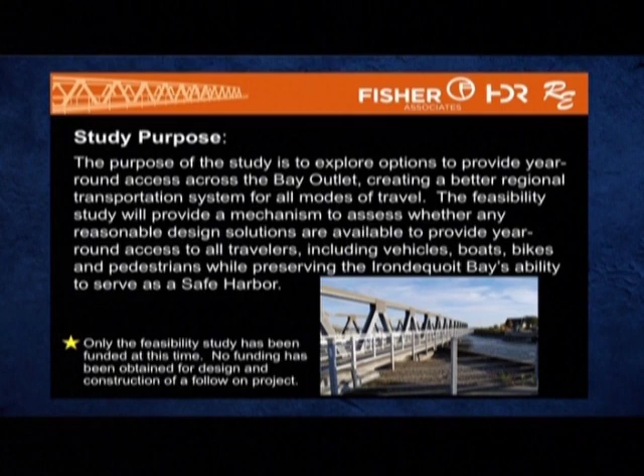From that point, we began an existing conditions analysis because things do change over time, so what might have been documented in previous reports needed to be looked at again and confirmed from an environmental and traffic standpoint. We collected all that data, and then held our first public informational meeting to discuss and present the results of our existing conditions analysis.

From there, we started developing a preliminary list of alternatives to look at as part of the feasibility study, evaluating potential impacts and costs of any alternatives considered in detail. We also conducted a public informational meeting at that point, outlining the preliminary list, and gathered input on some additional alternatives the public wanted to see evaluated. Those were added to the list as well.

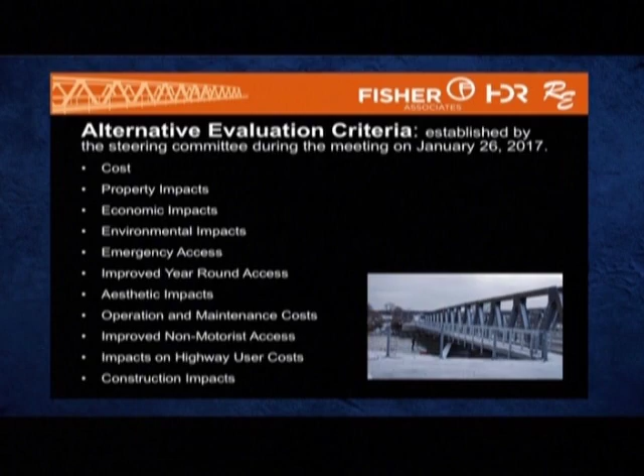They ranked them, one being what they felt at the time to be the most important. In this case, it was project cost, through construction impacts being ranked number 11, the least important for evaluating the criteria.

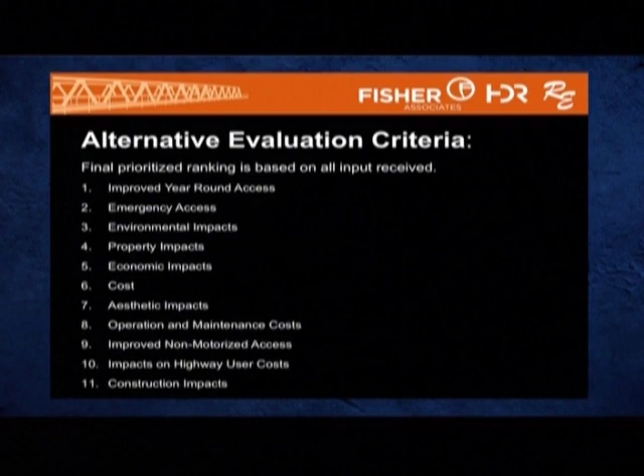So temporary detours, impacts to businesses, things of that nature were wrapped into construction impacts. This is the hierarchy that the objective process established to evaluate the alternatives, and this was set up prior to developing any of the alternatives, so it was a standalone scoring metric that could be used in the study.

The next step, back in January, was to develop the alternatives to be considered. This is a culmination of that list, and as Roseanne mentioned, at the first public meeting not all of these were under evaluation from the previous reports and the stakeholder committee when we started brainstorming what alternatives could be out there.

As part of that first public meeting, a tunnel option and a ferry option were also brought up as possible solutions that should be considered. So we took those in, responded to that public comment, and added them to develop the whole list. Starting at the top, the null alternative is fancy words for the existing condition—it's what's out there now.

It's the seasonally operated swing bridge that is put in place for vehicle traffic during the winter months and removed from service to allow navigation traffic during the summer months, not providing access for cars. That's a basis of comparison alternative, and that's why it's still in the mix—it's what's out there now, and the basis of all comparison.

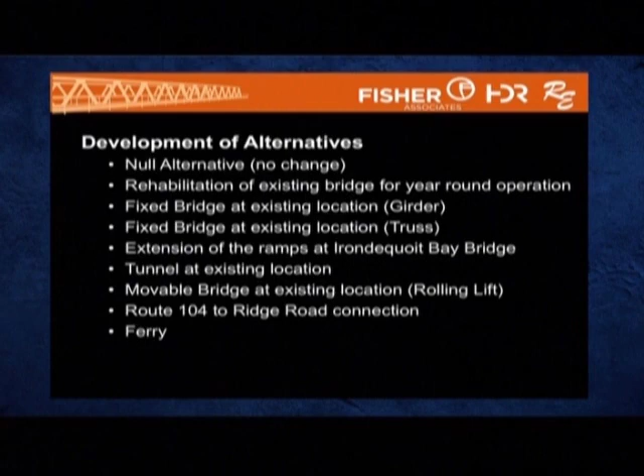We did some preliminary evaluations for feasibility, impacts, constraints, and situations. As mentioned, on the fixed bridge the Coast Guard required 75 feet of clearance for nautical traffic. When we looked at the impacts to the roadway, businesses, residences, and the character of the outlet area on both the Webster side and the Irondequoit side, the steering committee felt those impacts were too significant.

Similarly, the tunnel option, to get the roadway depressed underneath the outlet, required quite a bit of ramp network—instead of going up and over, those ramps were going down. That really interrupted access to the businesses on both the Webster and Irondequoit side, as well as the houses. So looking at the charm and character of the area, that alternative was also deemed not to be continued for further evaluation.

Then for the ferry, when you look at the staging of a vehicle, loading, traveling across the outlet, and unloading, a person could drive around the outlet or around the bay to the south and get to their destination quicker than using the ferry. So it wasn't serving the transportation connection purposes the study is looking for, and it was deemed not to be considered for further detailed evaluation.

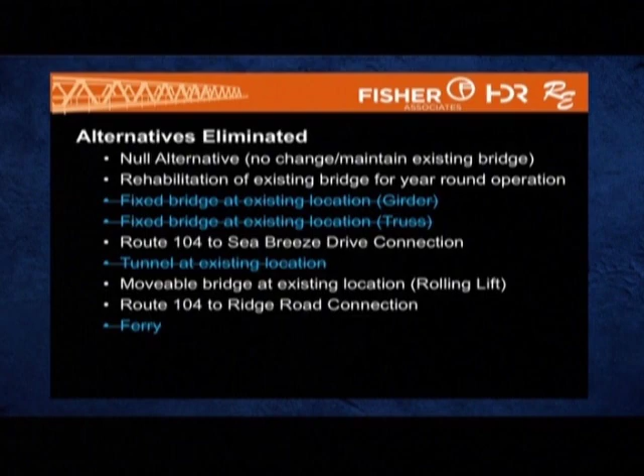Once those are removed, we're left with 5 alternatives that the process carried through to detailed evaluation and scoring, to see how the impacts of those alternatives are affected under all 11 criteria.

The 5 alternatives carried forward: the null alternative, maintaining the existing condition; rehabilitation or retrofit of the existing swing bridge to make it movable on a more permanent year-round basis; Alternative C, the Route 104 connection up to Sea Breeze Drive; Alternative D, a brand new movable bridge at the existing outlet; and Alternative E, the Route 104 connection to the Ridge Road area.

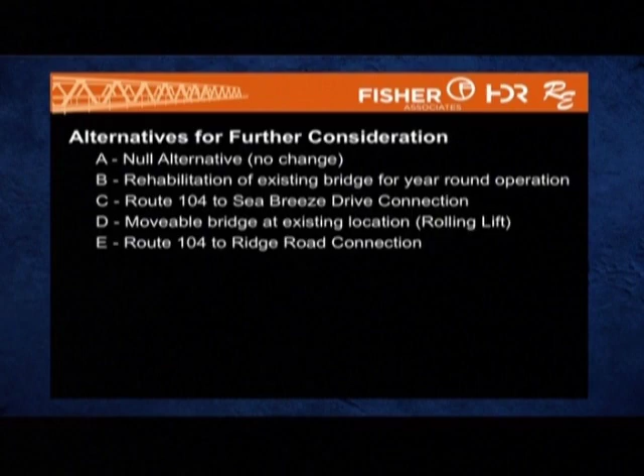The null alternative means no change. Some impacts to consider: there's no improvement to year-round access or emergency access during summer months—it would operate the way it is now. Additionally, environmental considerations like floodplains, wetlands, endangered species, noise, and impacts to properties are all unchanged.

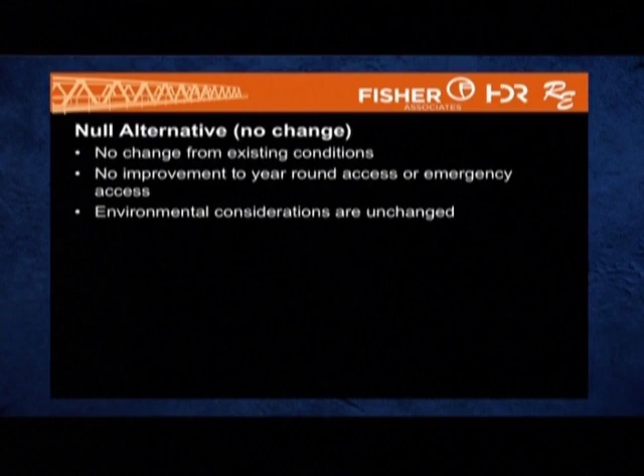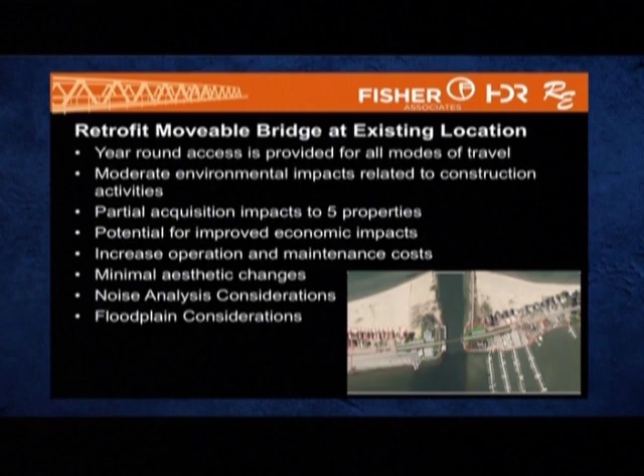Because it's a similar bridge to what's out there today, with its only change being how it's operated and that it's slightly higher, there's a minimal change to the aesthetics of the area. The nature and profile as it relates to the waterways stays fairly consistent to what's out there today, so it's a minimal aesthetic change.

With this alternative and that slight vertical increase, noise considerations would need to be analyzed down the road if a project were to come of this, deferred until later when you have actual traffic data and actual time of construction. The noise analysis and traffic studies have to be done within a certain time of when a project is going to be built, so the data is valid and suits the needs of the community. Whatever agency is leading the project would be responsible for doing the study and determining the significance of the impacts or mitigations required.

Floodplain considerations: as we all know, the lake and bay are within a designated floodplain, and this summer has seen its fair share of water. Looking at this project in that designated floodplain, because the roadway and bridge are already where they are, it's technically outside the effects of the floodplains, though they encroach near them. This alternative would have minimal impacts to the change of that floodplain because it would be built within the same footprint as what's out there today, so it wouldn't have big significance one way or the other from a floodplain standpoint.

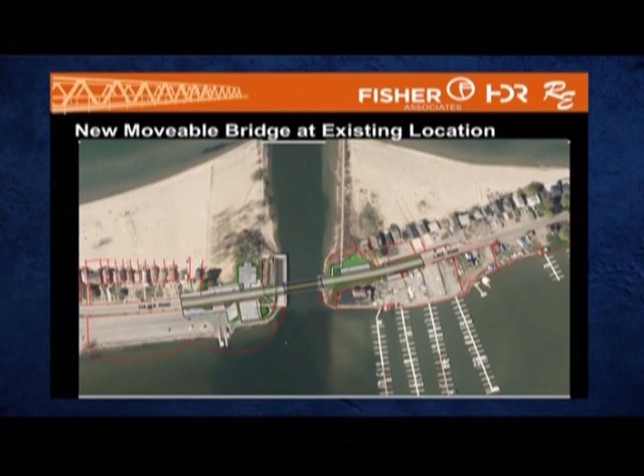Screening it again, very similar to the other alternative I just discussed as far as how this alternative would affect the area.

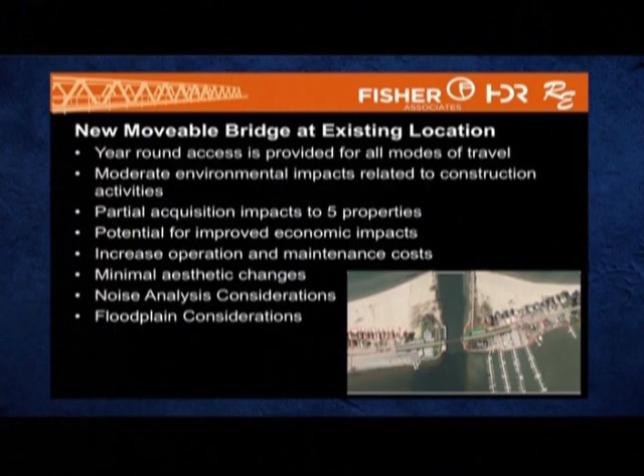So just looking at what a new movable bridge looks like, in this case the one we're looking at is called a rolling lift. It's where the steel girder structure of the bridge spans the outlet and has a counterweight on one side. When the bridge needs to open, motors engage the bridge and that counterweight tilts to one side, lifting the span of the bridge up, providing unfettered access to the outlet, so there's unfettered vertical clearance for those tall ships to get in and out.

To make that work, when we talk about raising that profile up about 6 feet, that's bringing the approach road work up on about a 5% grade across the outlet and back down. So that's what's establishing those eastern and western limits for the alternatives to tie in.

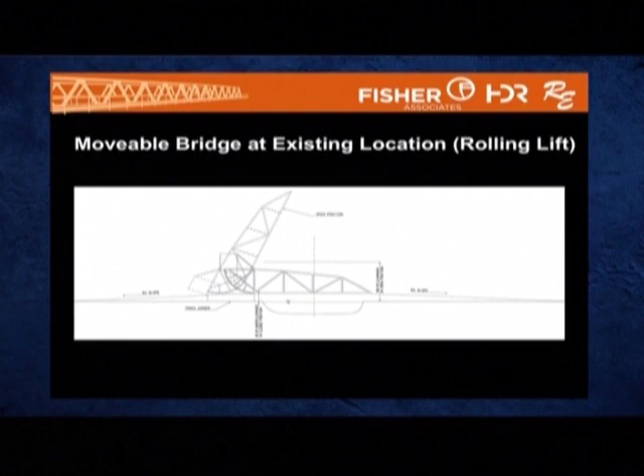When you look at nationwide standards of how a movable bridge operates and the time it takes, there's a process that goes along with it: lowering of the safety gates to stop vehicle traffic, the signals associated with that go to red, very similar to a railroad crossing, stopping vehicle traffic. That process going from green to red takes about 90 seconds.

Lifting the bridge up or swinging it out of the way under that retrofit operation takes about a minute and a half as well. Boat traffic, the marine traffic, would have about 2 minutes to navigate through the outlet. Then the bridge would close in about a minute and a half. The signals going back to green is a slightly quicker process than when you close it off, taking about 30 seconds. So that whole operation, from when the signals start to go to red to when they go to green and vehicle traffic can go, is about 7 minutes in duration.

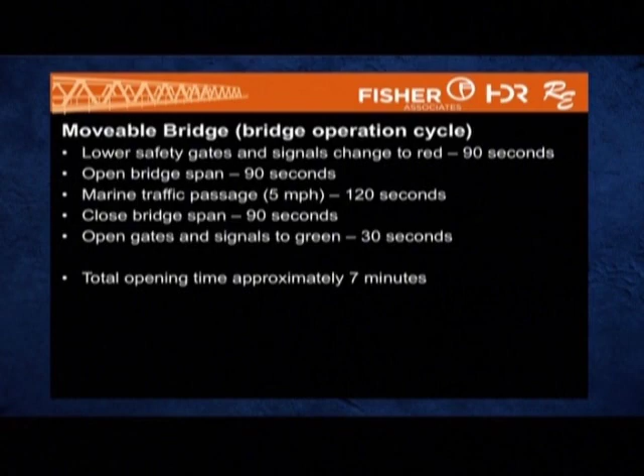Thanks, Rick. So obviously with that bridge opening, there's going to be some delay to vehicles that want to cross over the outlet while that bridge is open. What we've done is developed an estimate of how long those queues are going to extend when the bridge is up, so how far traffic is going to back up along Culver Road and on Lake Road.

And to step back a little bit here, this goes back to our first public meeting when we talked about how much traffic uses the bridge now and what the traffic is like in the area. Right now, in 2010, there's about 5,000 cars that cross over the bridge. We did some counts in March of last year, and that number is about 5,300 now. You can see some of the traffic on the surrounding roadways going all the way down to Route 104.

When the bridge is closed, you can see that traffic significantly drops on the northern ends of the roadways, and then there's slightly more traffic on Route 104.

We did find, going back in previous traffic when the bridge was open all year round, that summertime traffic is about 50% higher than during the fall and winter months. So there is a slight increase in traffic during that time frame. If there was a full bridge in place during the summer, we would expect between 7,500 and 8,000 cars going over that bridge.

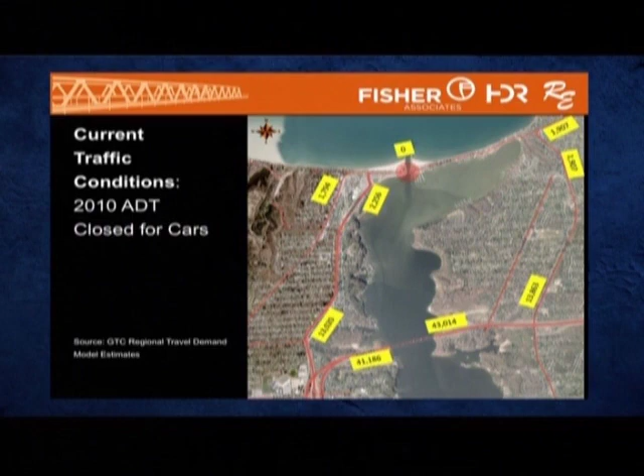Per day, yes. So with that information, we took a look at two conditions: the off-peak season conditions, which would be like your typical spring or fall day, and also the summertime, what the queues would be.

These are the estimated queue lengths during the off-peak hours. We looked at the time frame of approximately 7 a.m. to about 9 p.m. at night, so about 14 hours. Within that 14 hours, there are 3 or 4 hours in that day where traffic is the highest.

During the other 10 or 11 hours, traffic drops off significantly. We averaged what the queue lengths would be during those time frames. During off-peak hours on a typical weekend during the fall or spring months, on the westbound side you'd have traffic that queues back about 600 feet, and on the eastbound side about 600 feet too. When that arm goes up, it takes about a minute for that last car in line to get over the bridge, so you've got a delay of about 60 seconds.

During the average weekday, the peaks are a little different. Your peak hours are about 7 a.m. to 9 a.m. and then 4 p.m. to 6 p.m., your typical commuter hours. On the weekends, it's generally between 12 and 3 during the peak times of the afternoon. During the weekdays, the queues are a little longer because traffic volumes are higher, again around 650 to 700 feet.

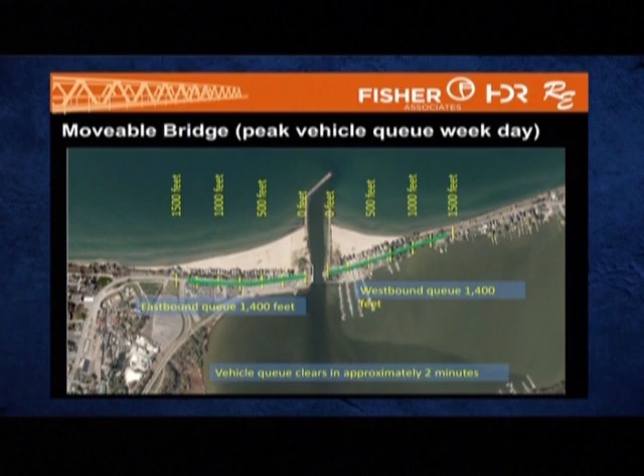There are ways to mitigate these peak hour queues. A number of locations across the United States that have movable lift bridges have a regular published schedule for when the bridge is open and closed, and everybody knows when it is. At some of those locations, during peak hours of traffic flow, the bridge stays closed for 2 or 3 hours continuously and won't let boat traffic through.

So that would be one of the things that could be discussed with the Coast Guard - if one of these movable bridge options were to come to fruition, that during these peak time frames we would want the bridge to stay closed to allow vehicle traffic to cross over.

Thanks. And again, that coordination with the Coast Guard would occur when an actionable project were to be developed in the future, similar to the noise analysis and other environmental studies that would have to be done at the time with current traffic, current conditions, and regulations in place a few years down the road.

Moving to another alternative for consideration, the Route 104 connection to Seabreeze Drive. Some of the impacts and concerns for this date back to when the original Bay Bridge was put in place, and those stub ramps on the west side of the bay were built as part of that project back in the 60s. They live out there today, not connecting to anything.

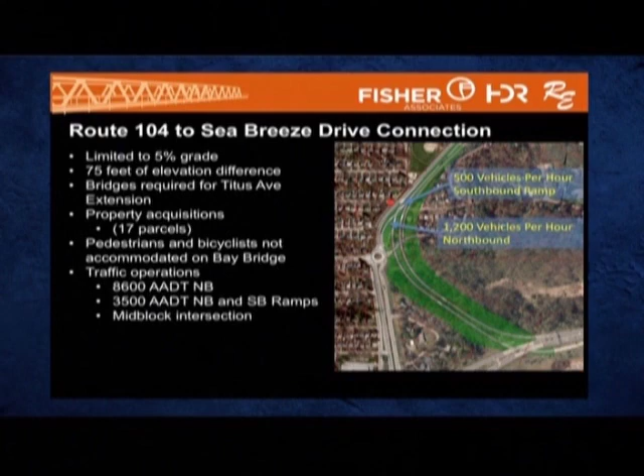Moving on to the other alternative, the Route 104 connection to Ridge Road. Here we're looking at 104 westbound and eastbound, with 590 north and southbound in that area. Irondequoit is to the north, points in Penfield to the south.

This would require a new ramp off 104 westbound, coming down and merging with the existing 590 off-ramp to Ridge Road, navigating through that intersection to the east, then heading up the 590 on-ramp to the north and continuing on. There would also be an on-ramp from 590 to 104 eastbound to provide those connections.

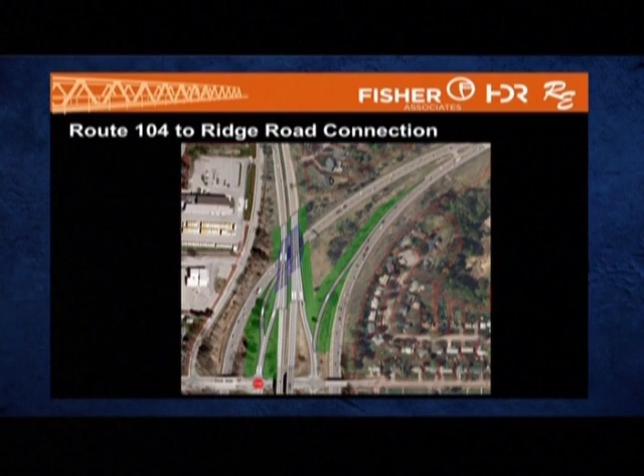Circulation of traffic would look like this: if you're coming from Webster heading to Irondequoit, you would travel 104 westbound, take the new ramp up, go through the intersection, a left, another left, and head up into Irondequoit. If heading the other direction, from Irondequoit to Webster, you would come down 590, use the off-ramp from 590 to Ridge Road, go through the same two intersections, go up 590 north onto that new slip ramp to access 104 east and out towards the Webster area.

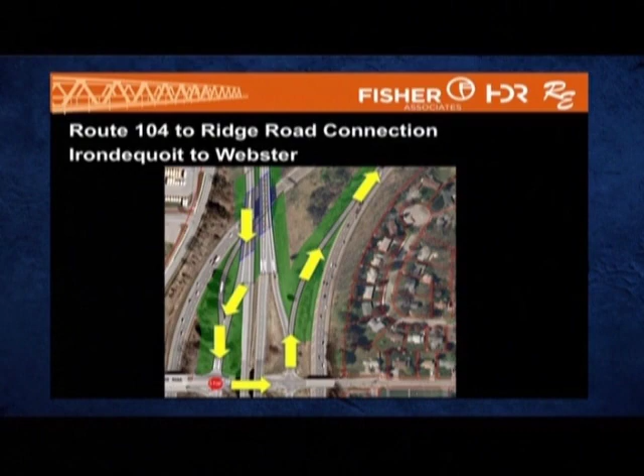Considerations for this alternative: again, all those ramp networks would be limited to that 5% grade change. There's a lot of grade change in this area as 590 goes over 104, plus the approach to Ridge Road and the road networks there. To get the distance needed to provide those ramps, both existing bridges that carry 590 over 104 westbound would have to be reconstructed to provide space for that off-ramp from 104 to the roadway network at Ridge Road.

Similarly, for this option, pedestrians and bicyclists are not accommodated because of restrictions on the Bay Bridge. This alternative does not require any property acquisitions, as all roadway networks could be constructed within the interchange itself and existing municipal right-of-way. There would also be minimal environmental impacts, since it's a roadway network now and all construction would occur within that disturbed footprint.

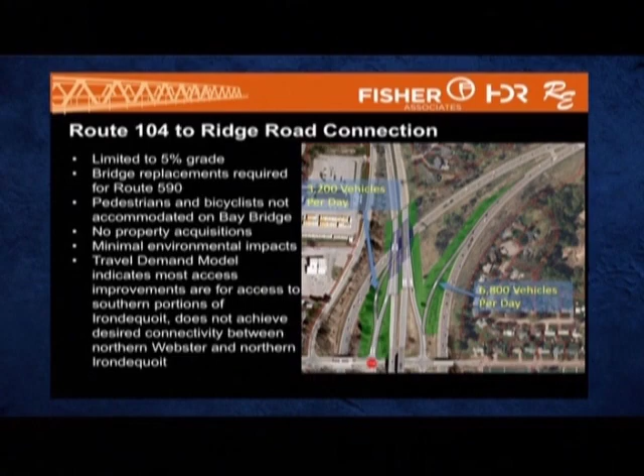The travel demand model is a roadway network analysis tool run for the county that looks at origin and destination and the quickest paths for people to travel. It was utilized on all of these alternatives, and for this one, it indicated that the access provided connects Webster to points in southern Irondequoit. People would not be making that turn I displayed with the yellow arrows to make an actual connection to points in northern Irondequoit, or conversely from northern Irondequoit to Webster. That indicates people would continue using existing travel patterns — Culver Road, the existing 104 on-ramps — as their points of connection.

So when we score this alternative against connection and improved access, which I'll talk about shortly, it doesn't score as well, because it's not providing that direct connection for northern Irondequoit and northern Webster.

Once we had conceptual projects or conceptual alternatives that would fit those 5 criteria, we went through and evaluated the construction costs, what the operation and maintenance costs would be for each of the alternatives, and major rehabilitation costs necessary to repair and keep whatever alternative it is working for the next 75 years. We forecasted all these improvements out for a 75-year comparison cycle. We looked at right-of-way acquisition costs, the process to purchase property necessary for an alternative, as well as the value of those properties. We looked at project development costs, the engineering, the studies, the actual construction inspection, and the methodologies necessary to build a project. We scoped those costs for each of the alternatives.

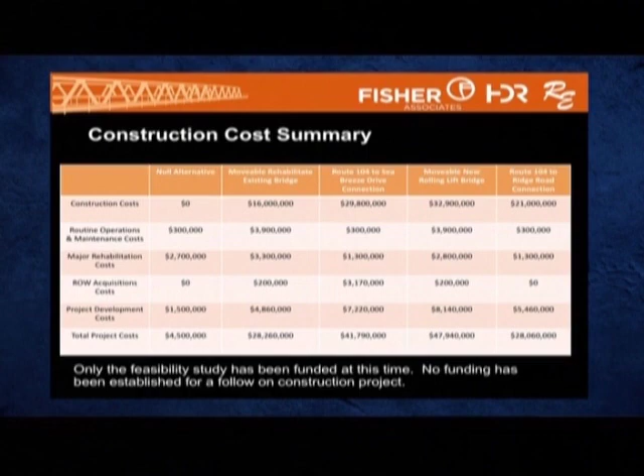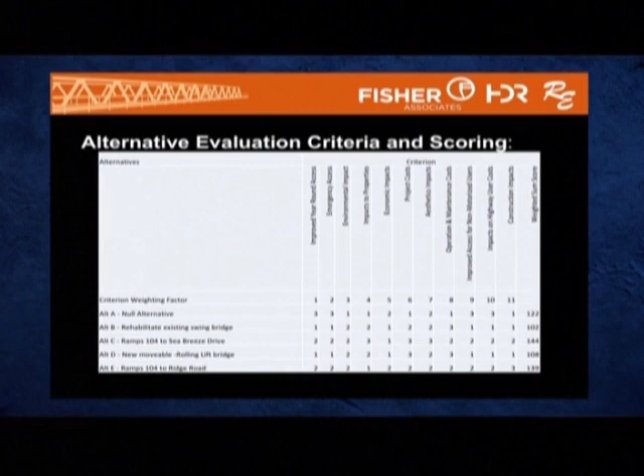So what are the next steps? As Roseanne mentioned, we're going to be finalizing the draft final report, providing that to both municipalities so it can be out for public review and comment over the next couple weeks. That'll be at the town halls, the town libraries, and then also posted online. So that summarizes that.

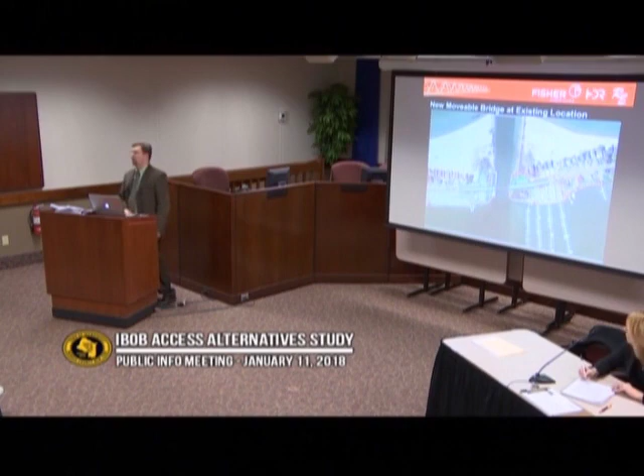Second question: the ramps for the Sea Breeze ramp system look to be more expensive. But I know that anything you build that's metal, steel, a bridge, you're not going to have those boat launch people running that bridge, you don't want them running that bridge, they can't even just get boats into the water, okay. Once you put concrete down, concrete lasts forever and is a lot cheaper per mile than building a bridge and inspecting a bridge and paying for parts and motors and then having people run it. You have to have 3 shifts a day, that's 3 groups of people, you need vacation time, people have to be properly trained to move that bridge. Was that factored into long-term cost over, say, 20 years, of what having a bridge would be versus putting Sea Breeze ramps in?

The answer is yes, all that was factored, and the answer is no, it wasn't just 20 years, it was forecasted out to 75 years, and then brought back to current dollars. That chart is that evaluation brought back; it has the operation and maintenance, it has the construction, it has the long-term maintenance and rehabilitation that either a roadway or a bridge needs. And with Sea Breeze Drive, there are bridges and structures to make this work, so there are bridges associated with this. All those costs were factored into the analysis.

Yep. I'll never say a bad thing about Phil Donahue ever again. This job is not easy.